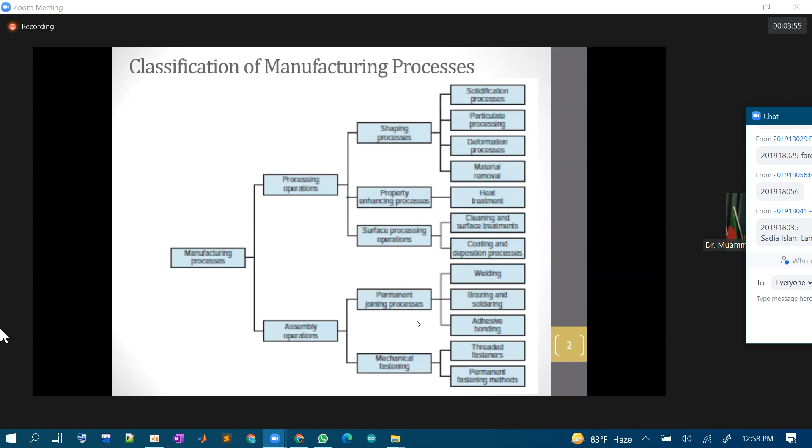So as we were saying, welding is that branch of manufacturing where you are adding material. It is considered an addition process, or you can say it's a joining process, and the joints formed are permanent joints because if I need to disassemble it, I have to cut the welding. So within manufacturing, we have the assembly process, within assembly there's permanent joining process, and within that is welding.

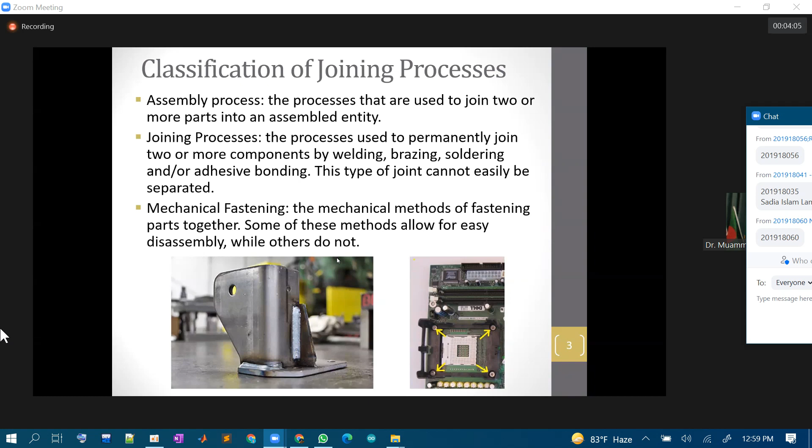And we know welding, soldering, brazing are similar. They have a lot of different uses, and there are a couple of different types of welding. A common one is arc welding, where you have an electrode and you essentially arc, passing high discharge voltage to melt the filler rod and seal the joint.

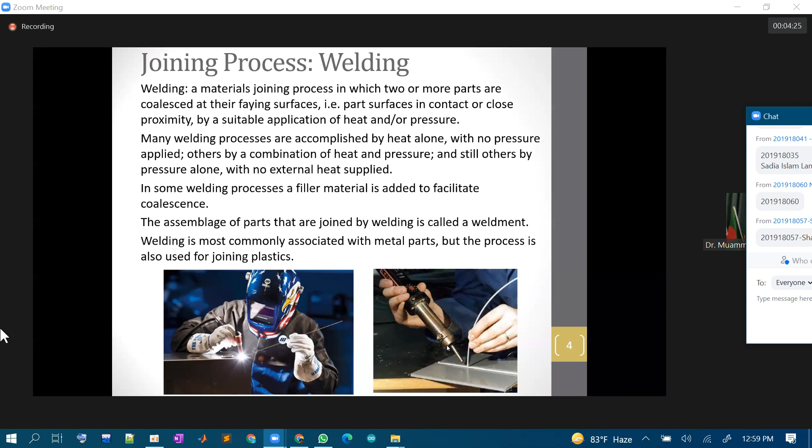Different kinds are there - we'll discuss a little bit of welding history, though this isn't very important, just for you to have an idea. These are the common ones. You have arc welding with the electrode, which is also the filler material - sorry, the electrode is usually tungsten and it provides the sparking necessary to weld the part. You might use a filler wire with the arc weld, or you might actually melt the part itself and join the two portions.

Usually you use an inert gas like argon to cover the weld area because the temperature is so high your metal actually oxidizes, and you don't want that, especially for steel and others.

The other one is resistance welding. Essentially you have two electrodes and you pass very high current. The high current melts and attaches the two weld parts, so you essentially weld like that. Depending on how you are doing it, you could do spot welding or seam welding. Spot welding is where you do small spots of welding along the length of the weldment - weldment means the two parts I'm joining together with welding. So as you go along, you can do spot welding or seam welding.

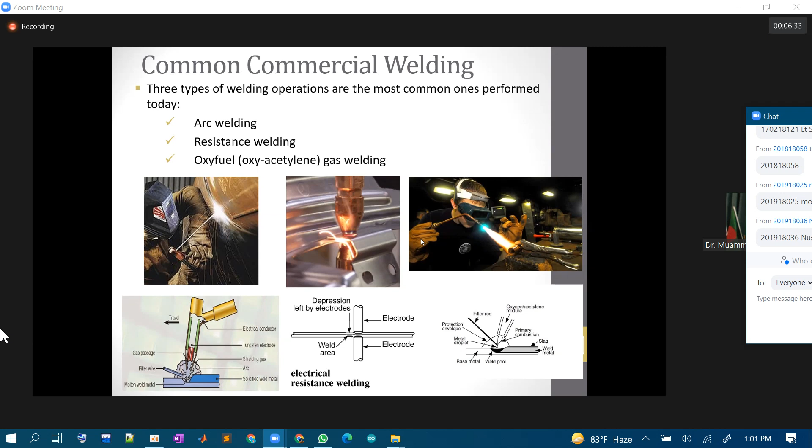What are some of the advantages of welding? Well, one is it provides a very permanent joint, and if you do the welding correctly, there are times when the welded area may actually become stronger than the base material.

It can be stronger than the parent or the base material if proper welding techniques are followed. Welding is also a very economic way to join, and that's why we see in different shops that alternative mechanical methods actually require elaborate processes.

Like if I want to rivet two plates, I'll have to make holes through them. If I want to screw them together using a nut and bolt, then I have to do internal threading or at least drill holes through them.

Then if I want to seal it again, because if I put the nut through the hole, there is some clearance along the hole, I have to use washers and other things, which becomes a problem. Plus, obviously, extra rivets, nuts, bolts and screws add extra weight to the joint.

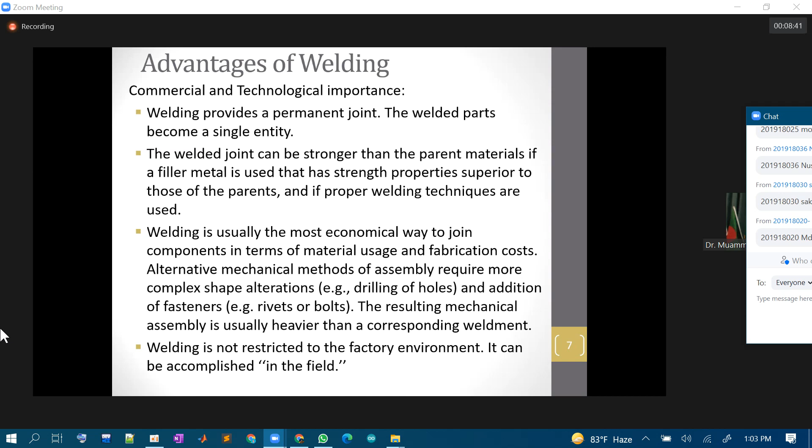Either arc welding or gas welding is more common, because you just need a gas cylinder. So you can do this, and those are some of the technological and commercial benefits. What are some of the problems?

Well, drilling and threading, nowadays you can do on CNC machines. You can argue that robots can also do welding, but it's still more of an art, so you need skilled people. That's a problem, it's a drawback. It is also dangerous.

We're talking about flame, cylinders and gas, and arc welding emits ultraviolet light, which is bad. As mentioned, welding causes permanent bonds, so if you don't want the joint anymore, you have to cut it. And certain quality problems in welds can actually reduce the strength.

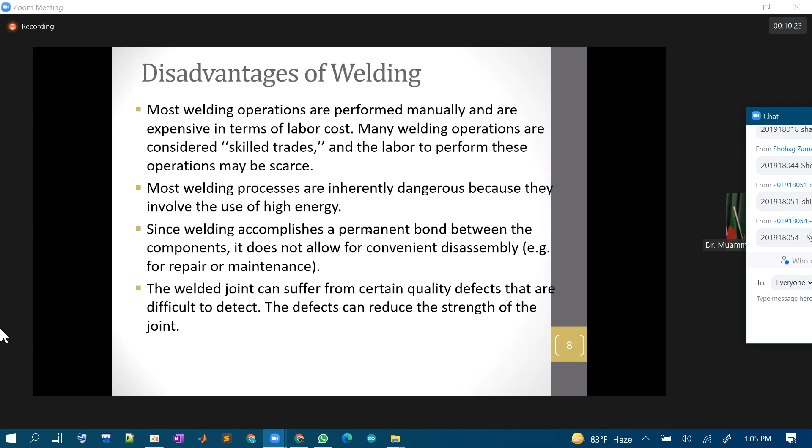Overall, if we say there are around 50 types and more of welding, it's definitely not possible to know all of them, but in effect we can categorize welding into two main types: fusion welding and solid state welding. Fusion welding is where we melt substances and join them, and solid state is the other kind. We shall see what's the difference between the two - solid state implies that liquefaction doesn't happen here.

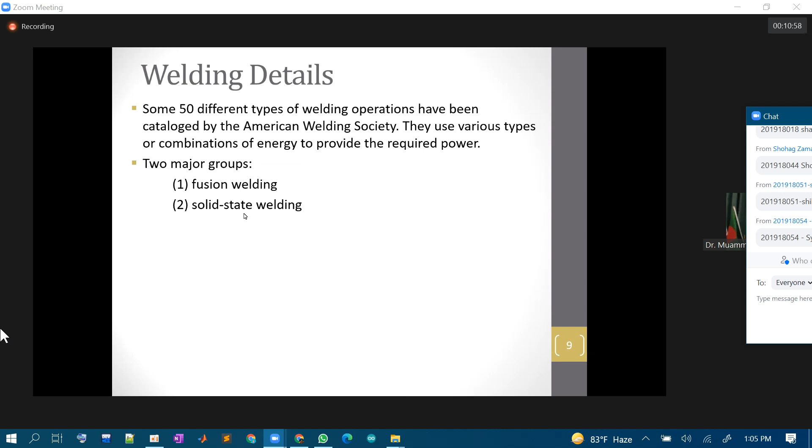So, fusion welding: this is the process where you use heat to melt the base metals themselves. So two base metals or the same base metal - you give enough heat that they melt and join. You can also, to facilitate the process, use a filler metal or filler material to further join the weld.

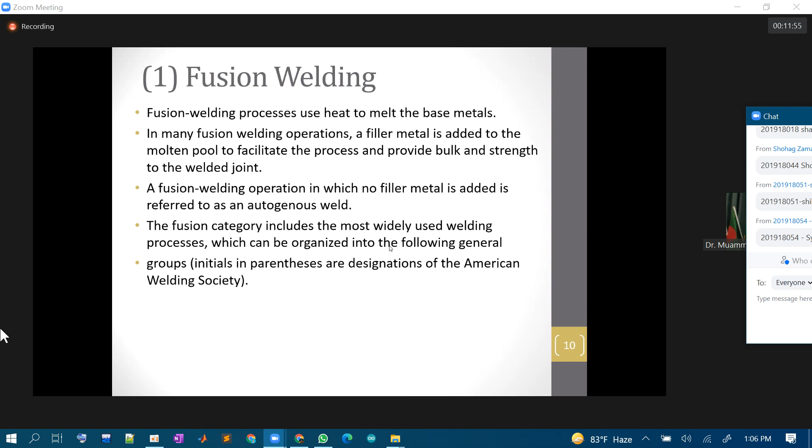In the fusion category, most of the widely known welding types are included - you can think of arc welding, oxyacetylene gas welding, these are fusion welding. Now let's come to arc welding.

Arc welding has a whole group, it's not only one type. We know two very common ones, TIG and MIG, right? These are the two common welds. MIG welding is used basically to join and weld aluminum alloys.

The process is something like this: you have the two parts, bring them together. You have the electrode, which is arcing. You have the filler metal, which melts and joins the two parts. And you give a gas.

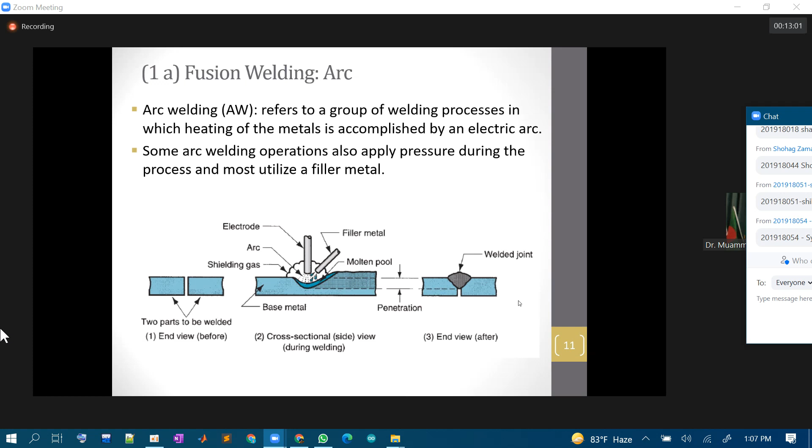This gas comes out of the nozzle of the arc weld, and it is not used for combustion. Rather, it provides an envelope around the welding area so that oxygen does not come into the heated zone and oxidize the metal. And then the welding looks something like this.

The other kind of fusion welding that I already showed is resistance welding. You have two electrodes, you have two metal plates that you want to melt and join. You pass electricity and develop a weld nugget or weld spot where the two metals are welded.

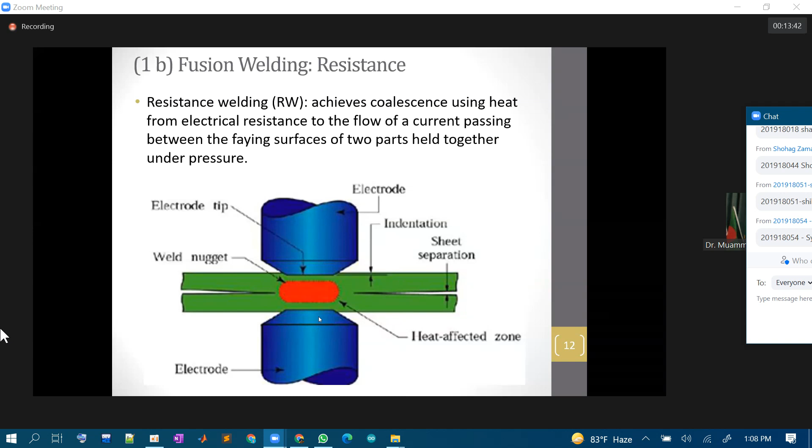So if you are moving slow, you could do seam welding, but if you move fast, you will actually have spot welding. There will be gaps, because it takes some time for the metal to melt under this electricity flow. The other type is the most common type.

Oxyacetylene welding is the most common type of fusion welding. Here we burn gas to produce such high temperature that it melts and fuses the base metals or parent metals together. We might use a filler metal, and usually it is preferred.

The process is something like this: you have the filler rod and the nozzle through which you deliver the mixture of acetylene and oxygen. It ignites here, the heat produces the weld, and you can do very nice spot or seam welding. You have to use two different cylinders, acetylene and oxygen. That is dangerous because acetylene is highly combustible, and pure oxygen is like an explosive.

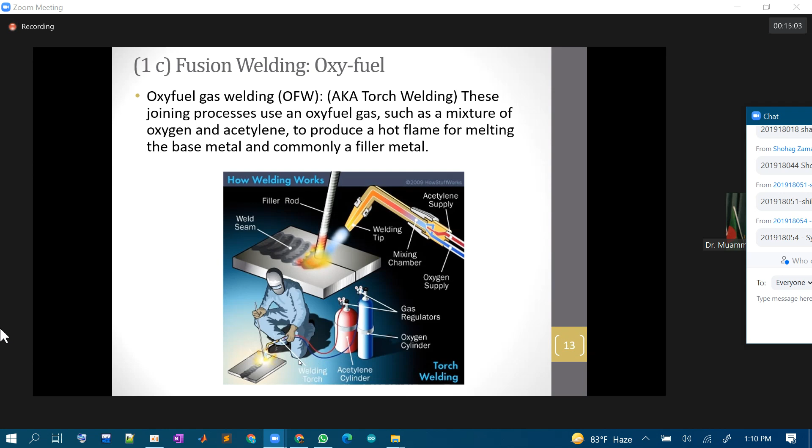So it had a problem. But the good thing is you don't require high electricity like in resistance welding or arc welding, and if you bring these two along, it's portable. You could do welding wherever you want.

So on spot, that's the benefit. Other types of fusion welding include electron beam welding, where instead of using two electrodes, you pass an electron beam through the metal, and the metals actually melt. Electron beam is something like your CRT monitor: you have an electron gun that emits high energy electrons, and when these electrons travel through and impinge on the surface of the metal, they deliver very high kinetic energy, which is converted to heat, melts the metal, and joins them by fusion. You could also use laser welding.

This is also very common. Laser can actually be used either to weld metal or to cut metal. Essentially, the laser delivers a lot of high energy in a very small area or volume of the metals being joined, and that high energy raises the local temperature past melting for the metal pieces. And that's how you can weld.

Benefits of laser: you have no mess of electrodes, fillers, gases, or cylinders, nothing like that. But it is energy demanding, sophisticated, and also potentially dangerous if not handled properly, especially for eyes. But they are used all over the place.

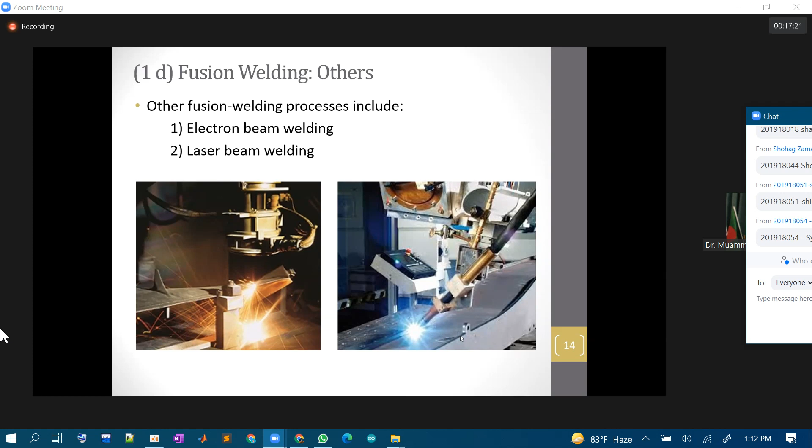Even in many vehicles, welding uses laser spot welds. If you inspect the underneath of the trunk or boot of a car, or the luggage rack, you will see the spot welds. Most of the time, these are laser welded. The main reason is that lasers can be automated very easily. You can use a robot and a computer to control where the laser goes, what energy is delivered, and when it starts and stops. It's very easy to control a laser beam. So that's why it's used.

The second type of welding is known as solid state welding, and it refers to a joining process in which coalescence results from application of pressure alone, or a combination of heat and pressure. So in fusion welding we saw that we give heat, which melts the metal or filler so they join together. For example, I give heat through electrodes, through burning of gas, through resistance, through electrons, or through lasers.

But the other kind of welding is where you apply a lot of pressure between two metal plates or two weldments, and you may or may not provide heat to speed up the process. But the heat is nowhere near the sort of heat used in arc welding or gas welding; the temperature is just increased to enhance the process. There is no metal filler used, and the metal plates themselves don't melt while being joined.

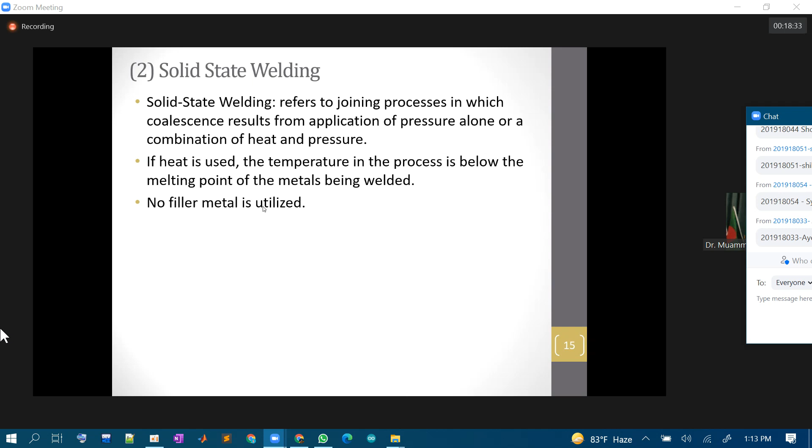So why would two metal pieces join because of pressure? They might be the same metal, like two mild steel plates, or they might be different metals with different elements. Why does joining happen from pressure? Well, this is because all metal atoms vibrate even under room conditions. If I place two metal plates together, there is some finite chance that electrons might go over to the other side, the other metal, and start to form bonds between the surface atoms of one plate and the surface atoms of the other.

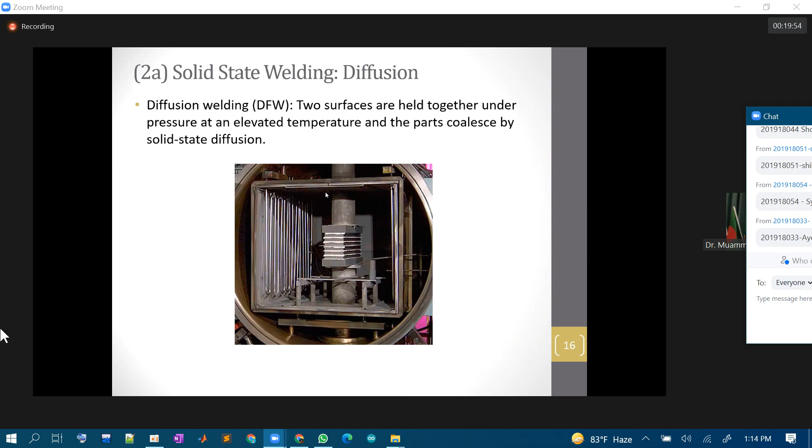When you increase pressure, this diffusion process is faster because the atoms are close by. Also, if you provide heat, that will speed it up because atoms and electrons move faster when heated. A type of this is diffusion welding, where two surfaces are held at elevated temperature and high pressure, and the parts then join by solid state diffusion.

The other kind is friction welding. This is also a solid state welding process because you are not using anything to melt any substance in the joint; you are not providing energy for that. Here, the coalescence or joining is due to the heat generated by friction between two surfaces. If two surfaces undergo intense friction and the temperature rises significantly there, you get friction welding. You can do friction welding of rods and similar joints using a setup like a lathe machine.

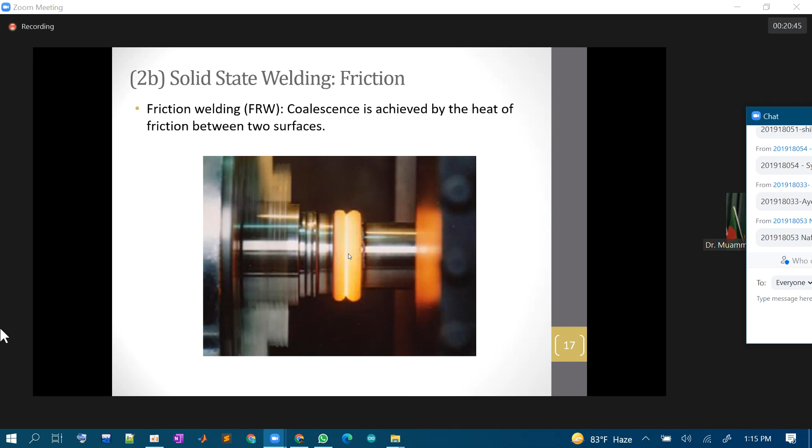Third solid state welding is ultrasonic. If you remember, the metals, if you press them and keep them, they might weld, a cold weld. How does that happen? Well, atoms might jump from one metal to the other, and this may cause joint, and that is how pressure leads to welding.

So if I can increase this jump of atoms between metals on the surface, I make the process better. One way is to heat it to increase the kinetic energy of the atoms so that they can bond, or you could provide energy in the form of ultrasonic vibration. Ultrasonic vibrations jar and move the atoms and help to join the two parts faster.

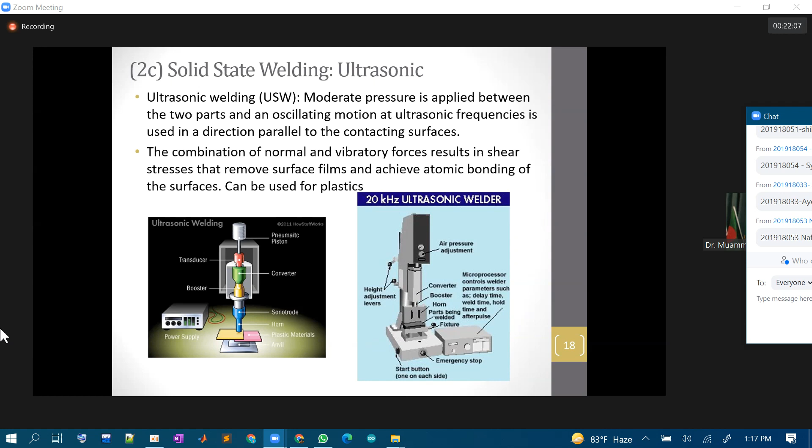The best thing about ultrasonic welding is it is the one that can be used to weld plastics. Certain plastics, you give ultrasonic vibration, and the plastic will actually fuse. You know it's not possible to weld plastic using oxyacetylene flame because it will melt.

So this solid state welding work is mostly a response to automated industry, where industrial welding arms are moving and welding that way. The welding head moves relative to the work, and this is how you can use robotic welds to make cars and other things.

So non-fusion welding processes are good because who wants to bother about fuel and all that. Especially if you are talking about oxyacetylene, or TIG, you burn out the tungsten over time, you burn out the fuel, the gas, acetylene over time.

So if I automate in an industry, I have to keep some way of replenishing this. But if I have a solid state process, using maybe friction welding, ultrasonic welding, or diffusion welding, you don't necessarily eat up the material, so you can continue for longer, and the process can be automated.

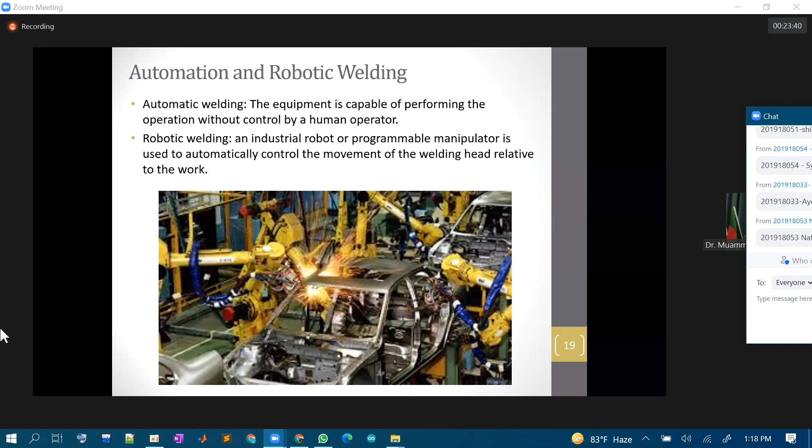Let me stop here before I go to the next part. Any question up to this?

Yes sir, a little louder please. No sir. Yes, I can hear now, go ahead. Yes. Okay, anyways. Any other question from anyone else? Any question from anyone else?

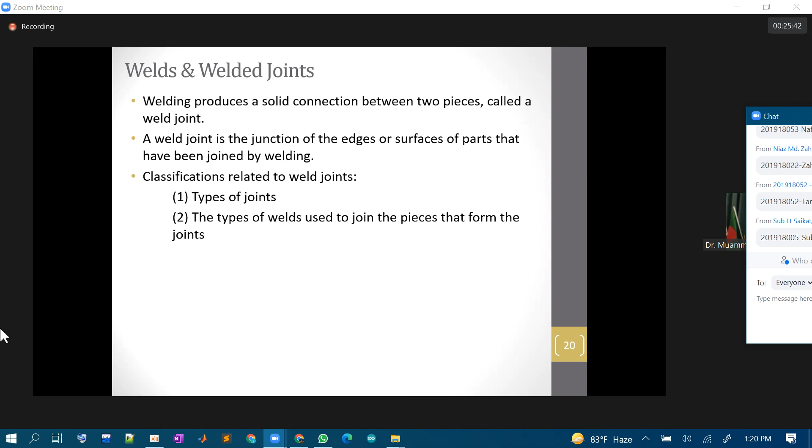A welding provides solid connection, and the junctions or the edges of the parts are also produced in the process. So based on the characteristics of the weld joint, it's related to the type of joint and the type of weld used to weld the joints together. The type of joints and type of welding, these two can be used to classify the welding type and product. Think of the types of joints.

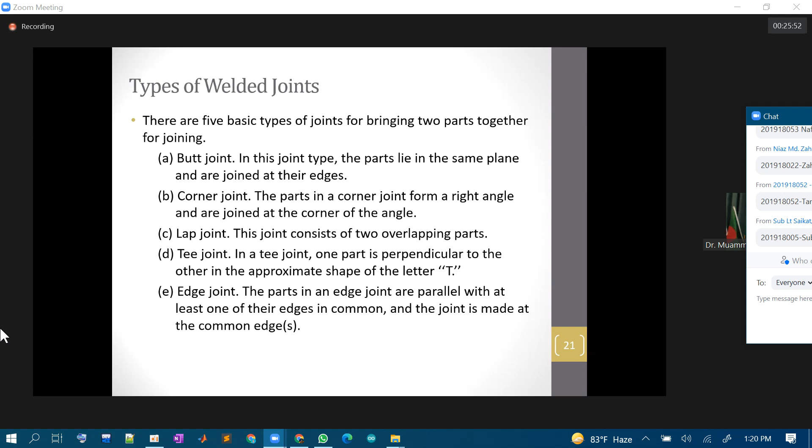You have a few joints: butt joint, corner joint, lap joint, T-joint, edge joint. And these are better understood if you see the picture.

So this one is a butt joint because the two products or materials join face to face. They're joined face to face. So this is what is known as a butt joint.

The second one is a corner joint. You form a corner, connecting one metal to the other metal's edge.

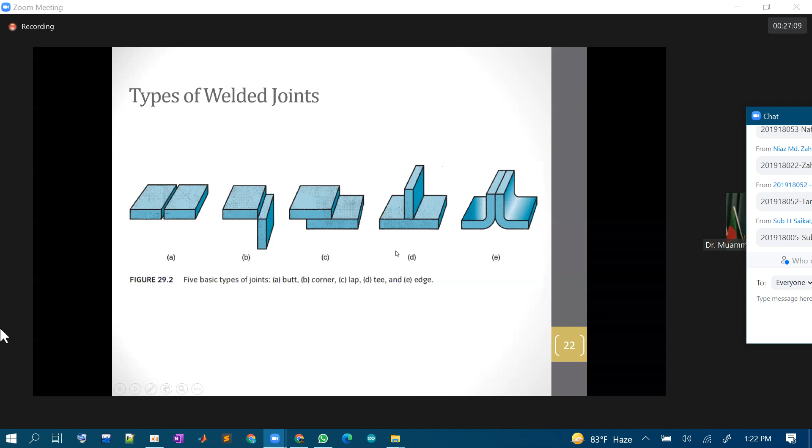Okay, these are the 5 main types of welded joints.

There are some more types, you can read this.

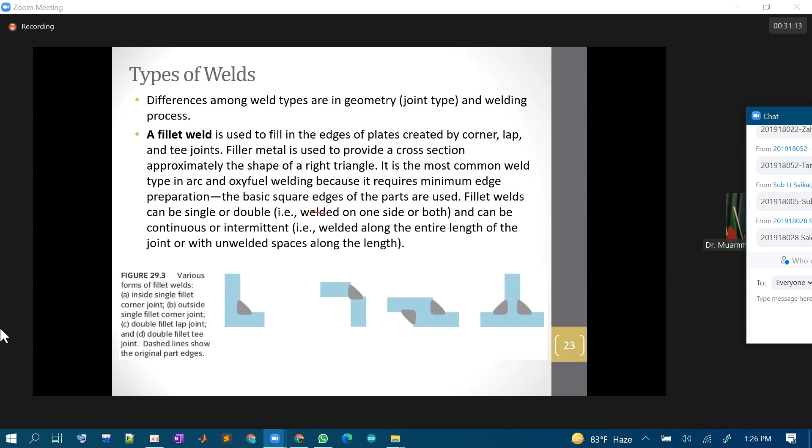We're still on types of welds. Let's see how many different types of weld I can show. Now, if I take two pieces and do a butt joint, meaning two metals facing each other directly - let's see, suppose there are two pieces forming a butt joint.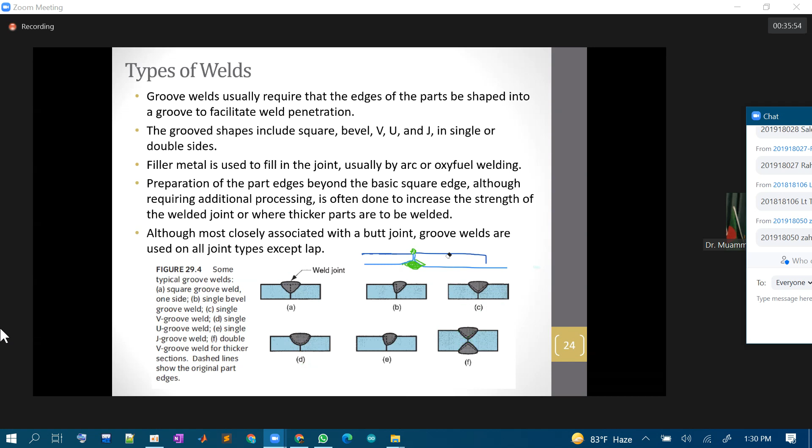So these are some of the pros and cons of these different welding types. All right, there are a few more. These are a little less common, but you can see them.

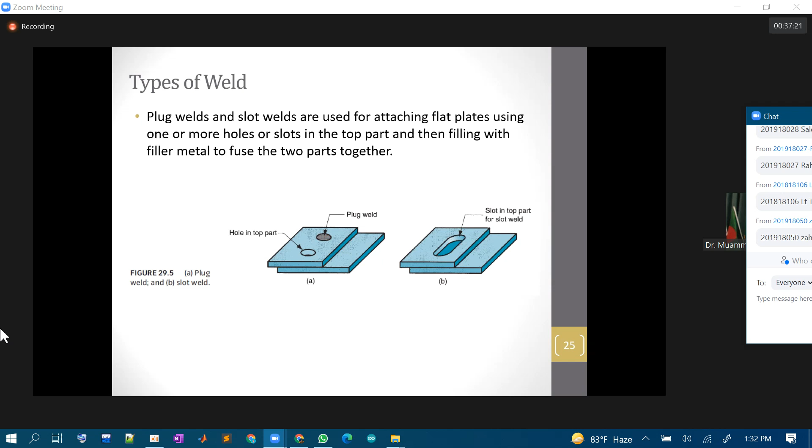Right, okay. So the remaining ones I mentioned - plug weld and slot weld - I've already talked about. That is what is shown in the picture here. Let me explain this a little bit.